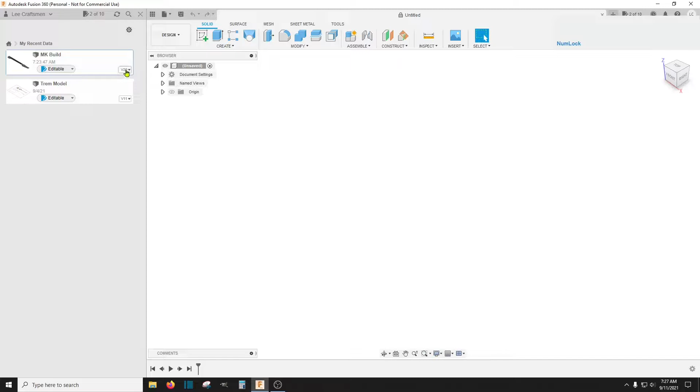I'll show you one thing up here. When you're opening up your projects, you probably notice this version number. You can click on this and go back and open up previous versions that you saved, just in case you've made some mistakes you can't really get away from. This is one way to go back in time.

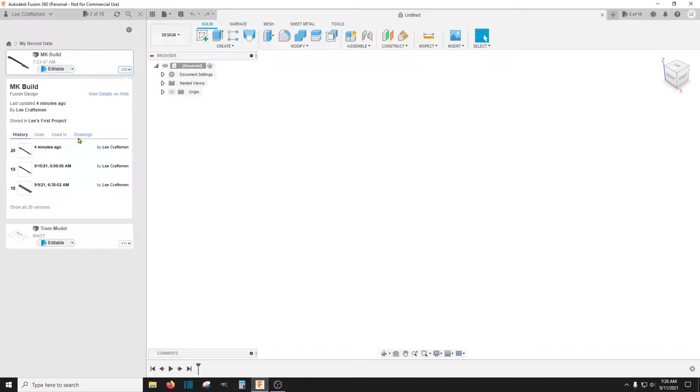For instance, I'm here 4 minutes ago that I saved, and I recorded the entire video without actually pressing the record button, so I'm going to do it all again. Just be aware that I've already done this once, so you'll see some stuff still showing up as saved already.

So a quick update. I ordered some parts from China on eBay, which promptly took my money and then 2 days later said we can't ship it to you for that cost. We need $25 more, or $22 more, after already paying $30 something in shipping. And I said no, I'm not going to go that route, just cancel my order. So the next day I get an email from China, which was very strange, that said, oh, our fault, we'll pay for it.

And they never do that. They never ever do that. I didn't respond to that. And then the next thing, I get an email saying, oh, the blue model's not available here, but we have a nice gold one we'll give you instead, which went from premium Chinese to bottom end Chinese.

So I declined that, and because it's through eBay, they had no choice but to refund my money. And the reason I was pushing on getting those out of China, not just ordering off the US sites, is that I'm using a 3-phase motor system out there right now, and I didn't want to disturb that. I want to keep it all 3-phase, and those are really expensive on Amazon.com and those kind of places.

However, I went ahead and just bought a 2-phase, which is actually better, a stronger motor, twice as strong. It'll be here on Monday, so hopefully next week we'll get back to business on cutting this stuff.

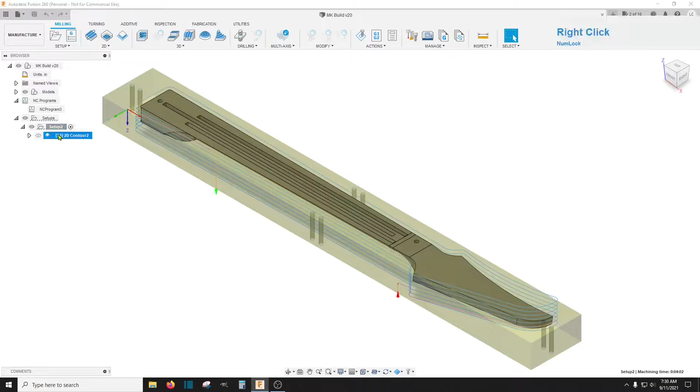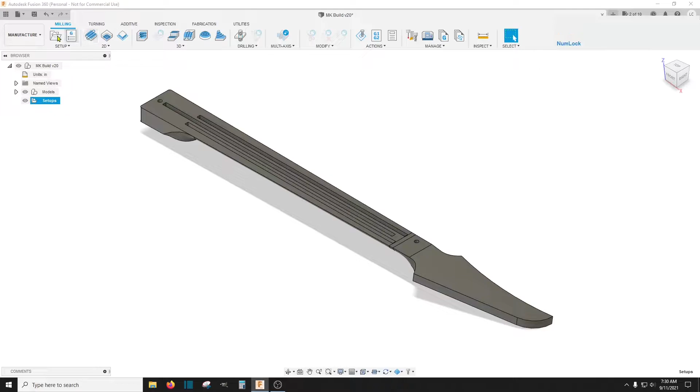So anyway, this is set up for the last cuts I did. I'm going to go ahead and remove these. And this is where we left off last time. So we're going to head on over here to manufacturing, and I'm going to create a new setup here. I'm just going to call this one the head, and make sure I'm in my G56 offset here.

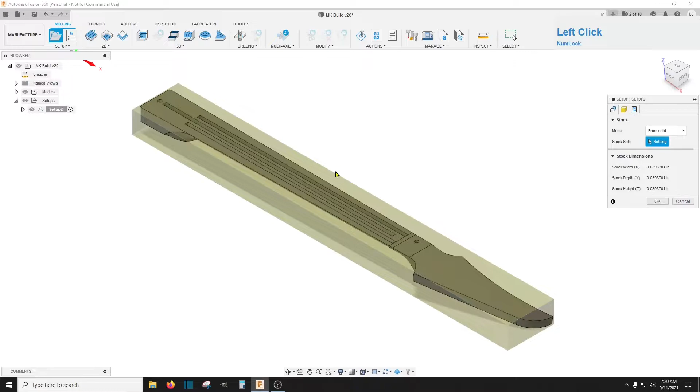And the mode will be from a solid. Neck blank, and then the stock point's going to be up here, and that all looks pretty good. I'm going to click OK on this.

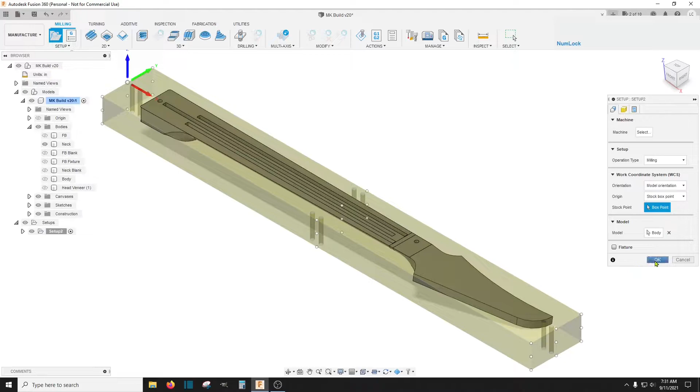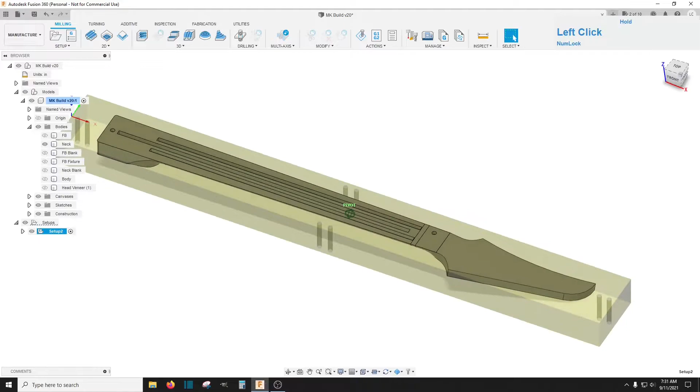Now, because I have a bandsaw, I'm going to remove all the bulk material, which you can see is quite a bit. Not so much on the front, it's just this area in here, but on the back there's quite a bit of bulk that has to be removed. However, for whatever reason, if you can't get that done and have to do it on the CNC, this front side is not incredibly taxing on the machine, but the rear is a lot of cutting to get all that material off the back. But here's how you would do that.

You go in here to this 3D adaptive clearing right here, and for adaptive clearing you're using a flat mill, so I'm going to use a 1/2-inch flat end mill here.

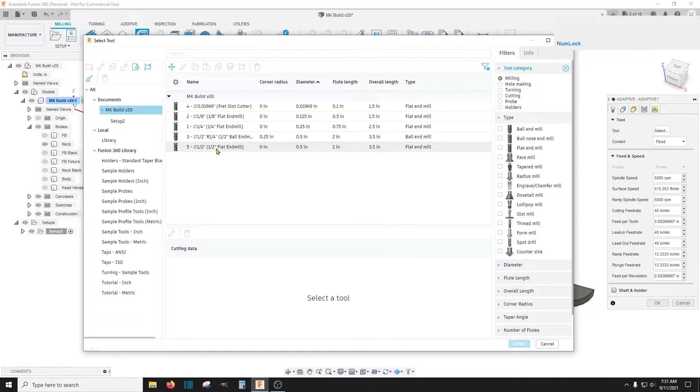Then for my geometry, I'm going to select — actually I'm going to turn off this stock contours, turn off this rest, and for geometry on this box I'm going to click on selection here, and then select just this top silhouette here.

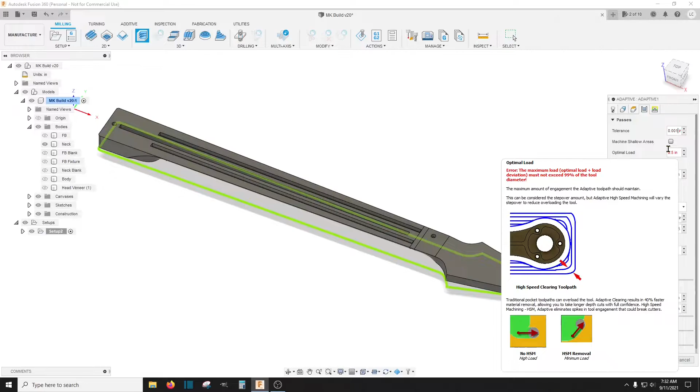And then we'll head over to this one and we'll drop this down to 0.001.001. Now this is not a step over, this is the optimum load on the bit. It cannot be greater than the diameter of the bit.

And depending on how rigid your machine is, this is how much meat it's going to take off of each cut. This adaptive clearing, they generally try to use as much length of the bit as they can and just take thinner slices. I'm going to drop this down to about 0.4.

And then the maximum roughing step down, this is how deep the cuts are going to be, the layers are going to be. For a 1/2 inch bit, I'm going to go to a 1/4 inch step down.

Stock to leave, make sure this is on. You don't want to cut it all the way down to the model. Turn on my smoothing here. Make sure this is 001, 0.001.

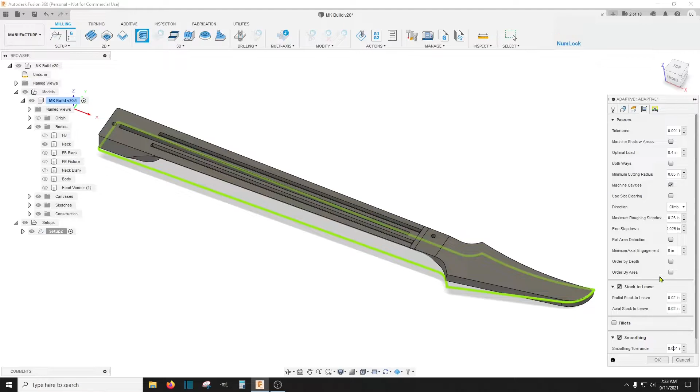And then the last thing, this ramp helix, we can probably take this up to about 10 degrees. At 2 degrees, that's just too many circles — more wear and tear on the machine. And just click OK on that, see how it looks.

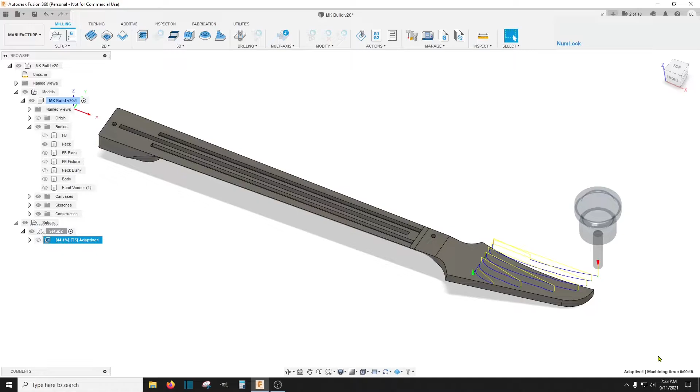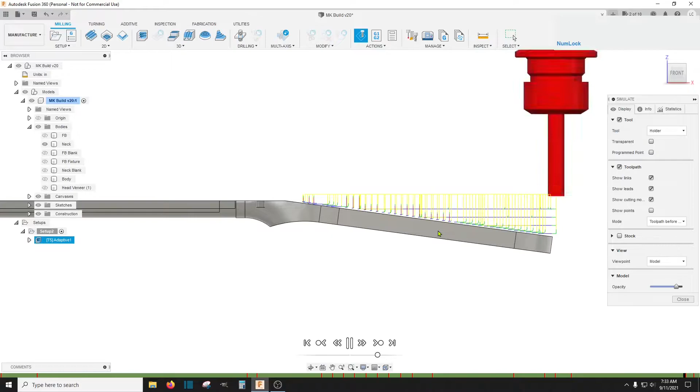Let's go ahead and run this and turn the stock off so we can see what that toolpath is going to look like. Actually, I've already turned the stock off here. Okay, so that's going to do 4 paths.

And then if we turn that stock back on, you can see what it's going to look like. That's what the kind of face it's going to leave on it. Bumpity, bumpity, bumpity. And that'll clear your stock out of the way.

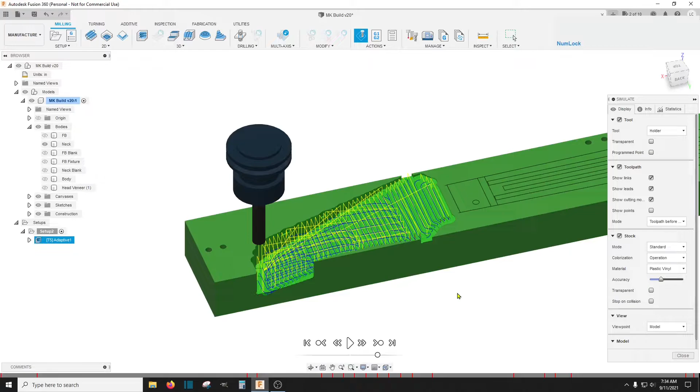And then from there you go to a 3D parallel cut here. And this, you'll need a ball nose. I can't stress enough, make sure you read this very well. Ball nose, not bull nose. It makes a big difference. It'll mess your model up if you do bull nose, unless you have a bull nose bit.

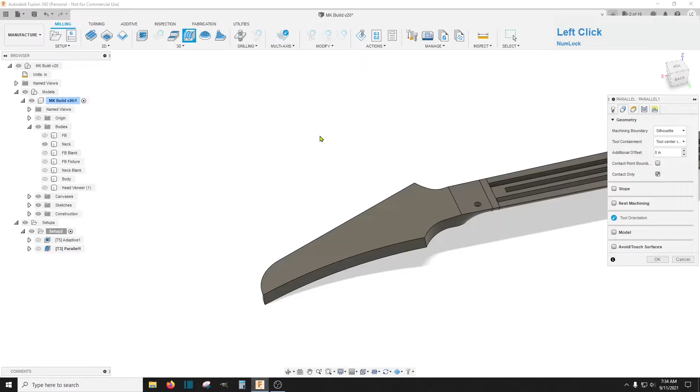And then for the geometry, same thing. We're going to select this top band here, and then we're going to use this avoid and touch surfaces, and we'll go to the touch surfaces, and we're going to select just this head up here, and we can take this tolerance down right here too.

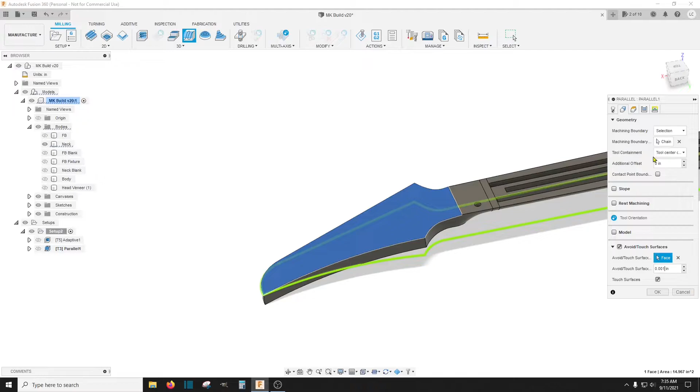All these tolerances are taken down throughout the model here. What that does is speed up the cut time, because that's way too much tolerance for cutting wood. I mean, that's more tolerance than the sandpaper, so there's just no need in being that precise for what we're doing. It's good that Fusion has that much tolerance in case your machine is strong enough to cut metal.

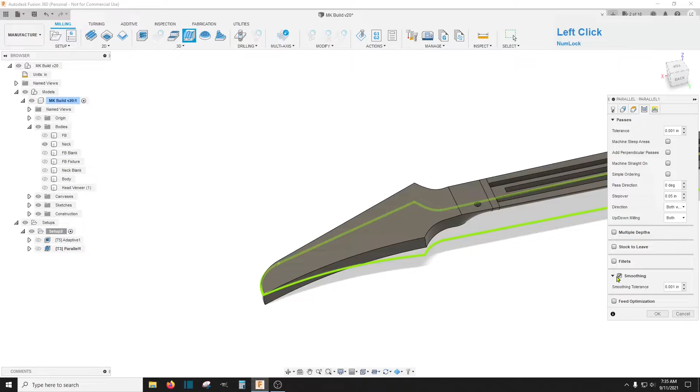And then here's the step over, and this is how much sanding you want to do when it's finished. So I'm going to put that down to about a 0.05 inch step over. Don't leave any stock on this one. Turn the smoothing on, and should be good to go on that.

Yep, up and down, back and forth. Stays inside. And as you can see, the first cut you did left plenty of room that your bit's not going to dive into the sides when it comes close to the edges out here, or it shouldn't anyway. So I'm good with that.

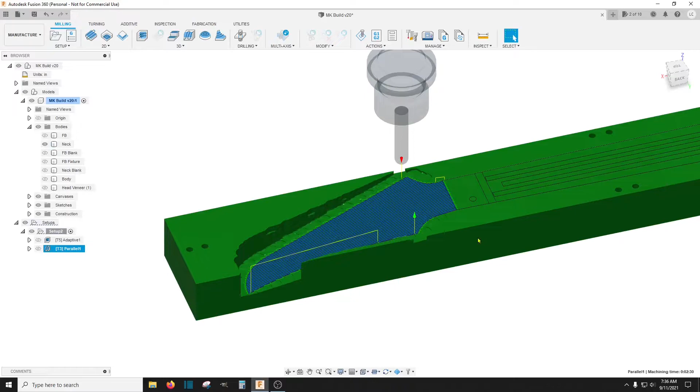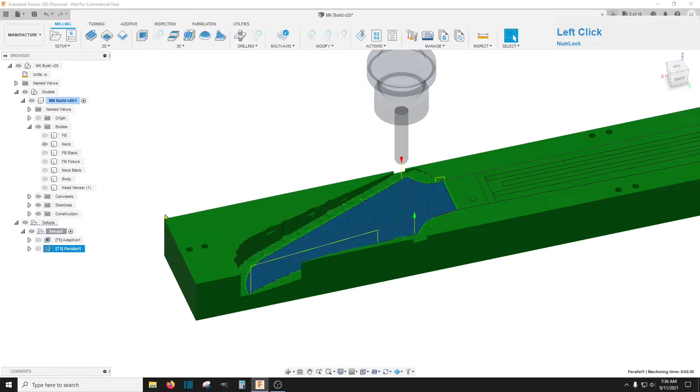Now, as before, you can't save both of these as one motion because we're going to change the bit in between, tool change. So you would have to click here and up here to save or post that one, and then come back and click here and do a second post, which is the only one I need. This is my head document. Post that. Overwrite the following, yes, because we've already done this once.

And make sure you're in your G56. You'll know if you're not in G56 when you home your machine. You change your offset, you move your machine out to the G56 offset, you get your model in place, and you hit run, which is always done at very, very slow speeds the first time to find out which direction your head's going to move in.

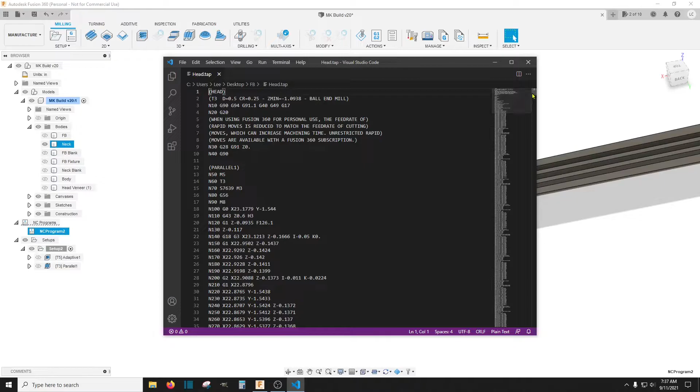If it starts taking off in the wrong direction, headed back for home, you know that your offset is wrong here, in which case you just open this file up, even in a notepad, doesn't matter, and change this to the G56 offset. If you forgot to do it at this point, you can always change it later. But that's just a tip. If your machine looks like it's going the wrong way, it probably is going to the wrong offset. Take out these homing moves and save.

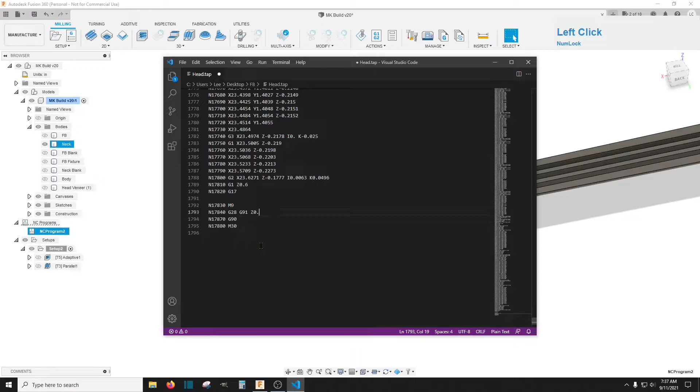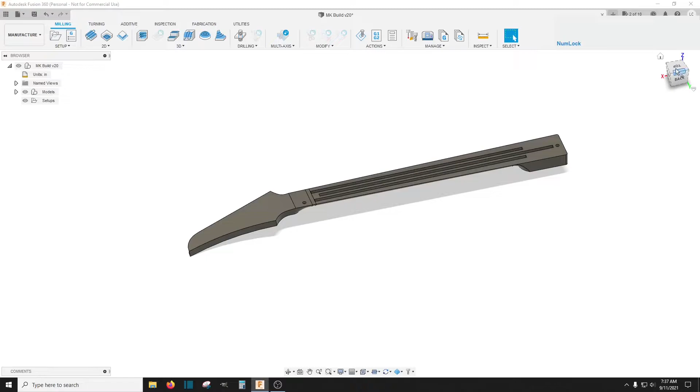Alrighty, so we got that part done, and I'm going to delete this whole setup because we're going to roll this thing over. And delete this posting, hide this stuff. Now I want to roll this thing upside down and rotate it twice this way, like that.

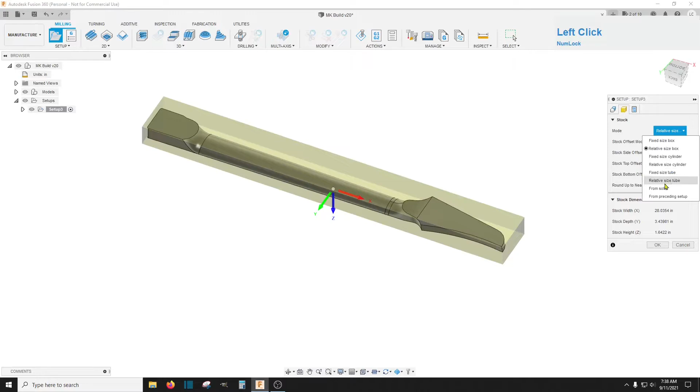And we're going to do the same thing again here. We're going to create a new setup and go here, and this I'm going to call the neck back, and change my offset to my G56. Go to my stock, and I'm going to use that from solid models neck blank.

And then here for the box point's going to be up here now, and hit this here to flip it over, and that's good.

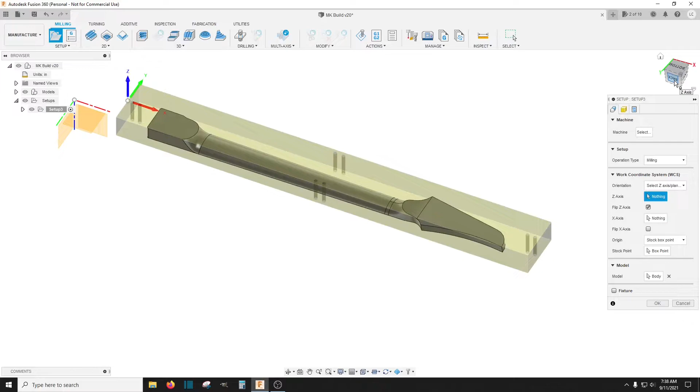So the reason we created this stock to start with, besides just having a piece of stock that we can actually cut, it just keeps everything exactly where it's supposed to be. Without using stock, then you have to center everything up, and it's just way easier to just make a piece of stock to use. Everything then is exactly where it's supposed to be, and very little chance of having something set up wrong or incorrectly, or a cut height not correct, when you use a stock instead of just using the model to work off of.

And okay, that's all good. Click OK on there.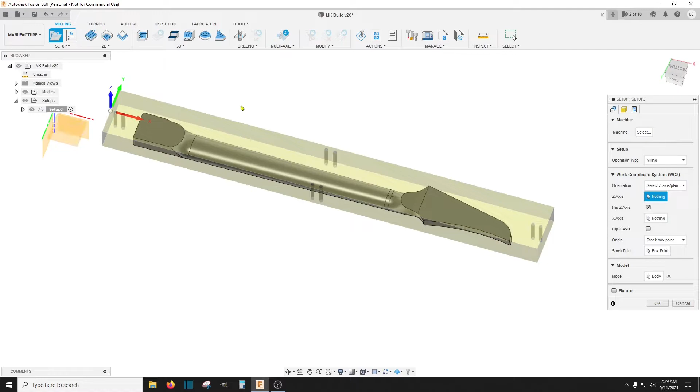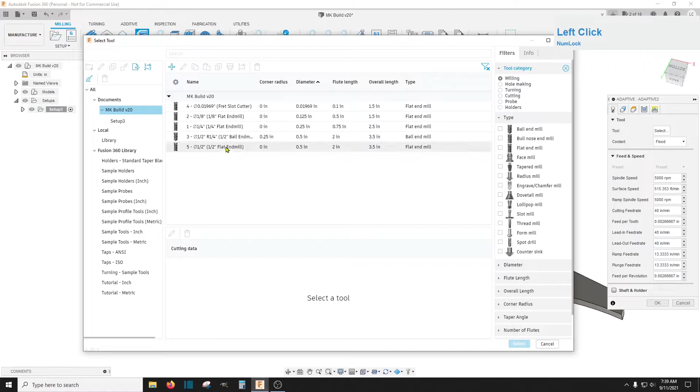And again, if you need to do a clearing move, it's really going to eat up a lot of your machine life. That's a lot of material to move. So I'm going to go to this 3D adaptive clearing again, flat mill, select those same lines. Whoops, get rid of the stock contours, reset, change this to selection, and select those same lines as before. Now it's on the bottom.

And then go to this tab and knock this down to 1. And change this load here to 0.4 for this mill. My step down is 1/4 inch, which I could actually probably go 1/2 inch with this bit. My machine's pretty stout.

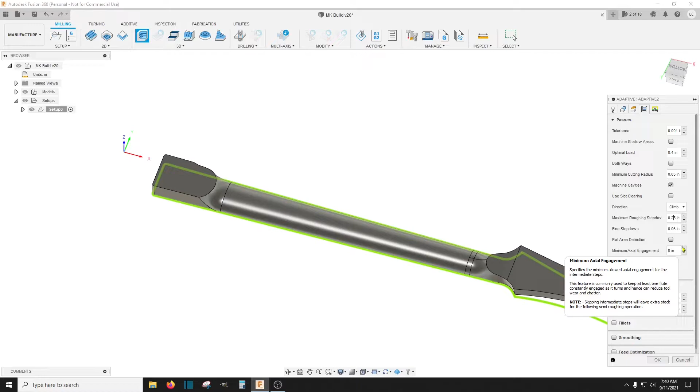Stock to leave, yes. Smoothing on. Take this 0 out of here. Same old, same old. And the ramp can go up to 10 or 12. Let's put 12 in here for this. And click OK on that.

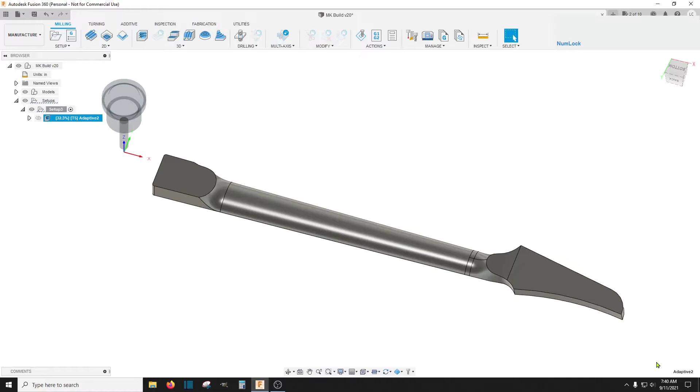Calculating, calculating, and that looks pretty good. Looks like everything stayed inside the boundaries.

Gonna flip it up here on the bottom just to make sure it's not going through. These yellow lines are just moves of the machine. That should be above those holes. It's the blue lines that are actually cutting, so those are just moves. They look fine. It looks like we're all good for that.

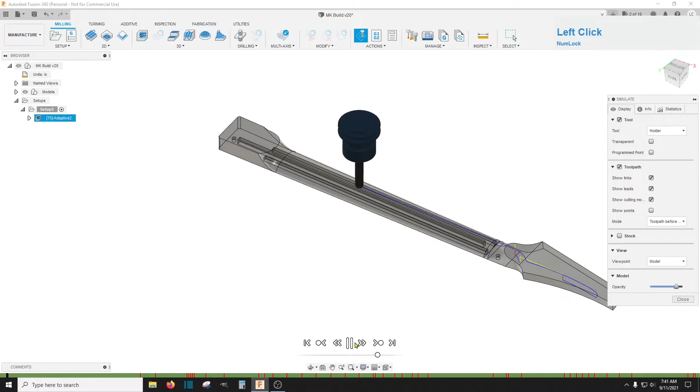See what that looks like. If I can turn this stock off and run it, we can see the milling.

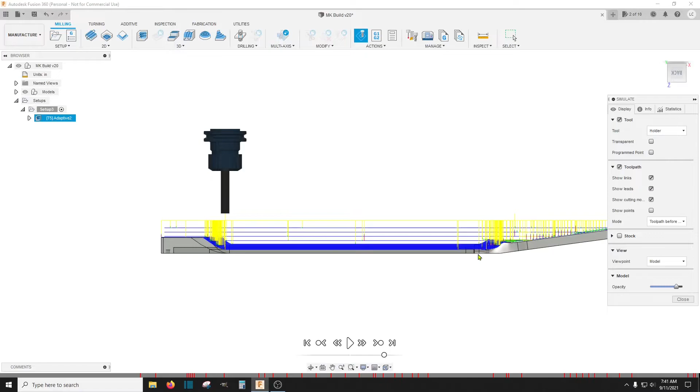It's pretty strange to mill. It's bouncing back and forth from end to end to end to end to end to end. It's a lot of wear on the machine, but it gets the job done.

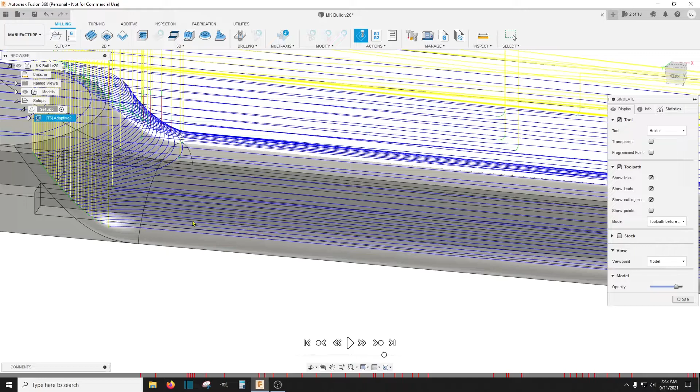Wondering a little bit why it's not going all the way down. I guess that's 90 degrees right there. Yeah, I guess so. That's because the contour is still at 90 degrees here. Okay, we'll find out when we cut it. Maybe some sanding involved if it's not exactly right.

So that's good for that one. So the next process, we'll go back to the 3D parallel and change back to the ball end.

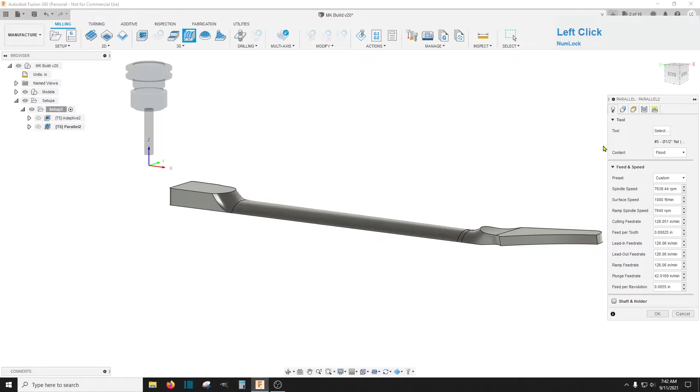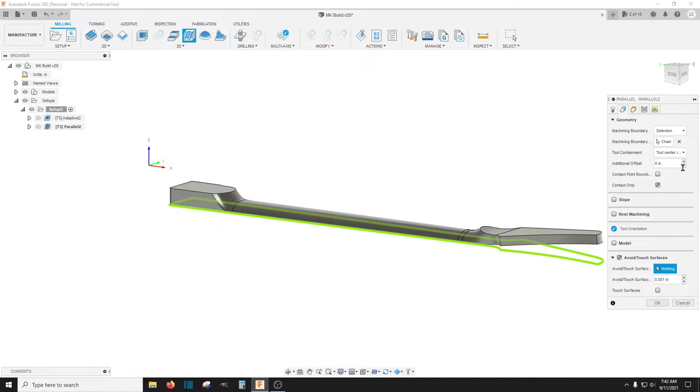And select that same silhouette here on the bottom. This time we're going to use the avoid/touch surfaces again here. We'll take this tolerance down right here for sure. And then the touch surfaces will be everything facing up here.

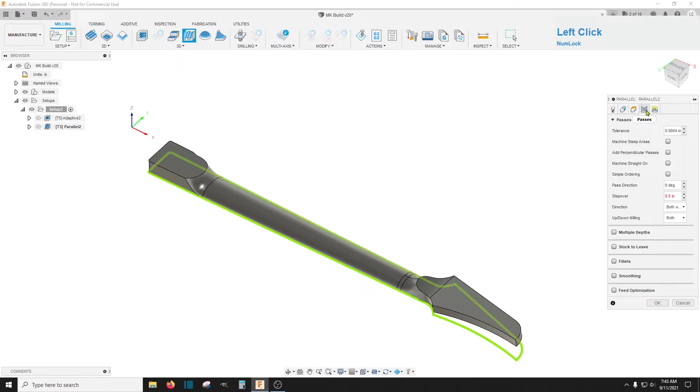All of that, that's good. Tolerance. Step over will be 0.05. And smoothing on, and should be good to go.

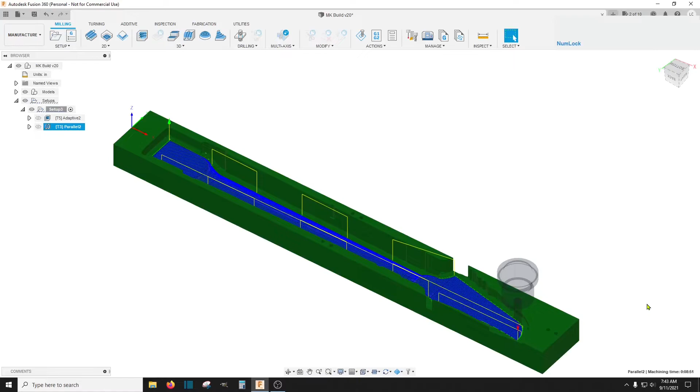Looks good to me, I'm gonna post that one. The neck back is fine. Just resave all this stuff, that way I am cutting exactly what you saw me design here.

Okay, I'm going to get rid of these two. Keep the same setup. And now we're going to do a 2D contour.

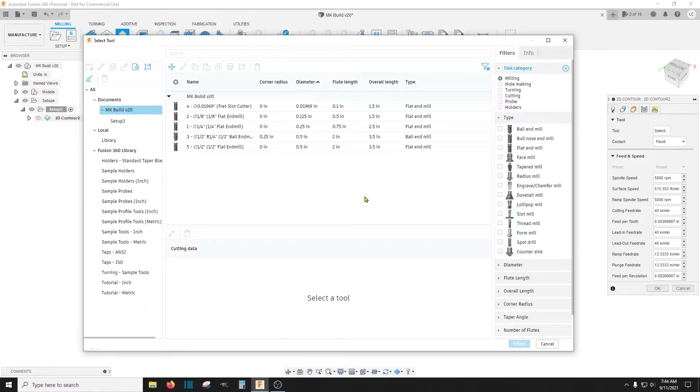Now for this, you can use a flat end mill. The smaller the bit, the less chatter you're going to get, the less material it's going to move, and the less chance it's going to be of pushing your stock off of the table. And also the quieter it's going to be.

And the reason I mention that is that at this point there's going to be a couple of pins sticking out into the neck on the back, and that's going to give it most of its stability from moving in any lateral direction. But the only thing that's going to be holding it down on the table is the tool pressure and some double tape and super glue trick, which is really strong. I never really had an issue with doing it this way, but we're not going to have any mechanical fasteners holding this thing down as far as laterally for the finish of this cut.

Now it will be held down by 4 mechanical supports all the way down until that last cut. When that last cut comes around, it's going to have to rely on the tape to hold it in place. That being said, the big bit's going to create a lot more force on that last cut, which really shouldn't matter. It's only going to be paper thin most likely, or we could tell the machine to make the last cut paper thin.

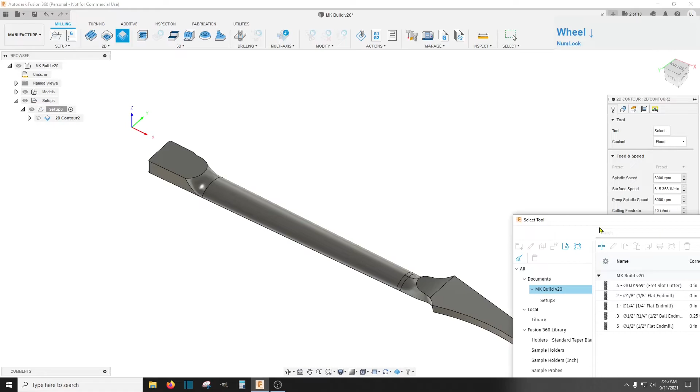But still, if it touches the side of the model at all, it's pushing all the weight of that cutter, trying to push this thing to the side laterally -- or, I mean, at some point. Anyway, you get what I'm talking about. Side to side force is going to be increased the bigger the diameter of your end mill.

I found 3/8 is a good in between for sound, vibration, and noise. 1/2 inch is a little bit too aggressive, and a 1/4 inch generally I can't really find a bit long enough usually to get around everything comfortably.

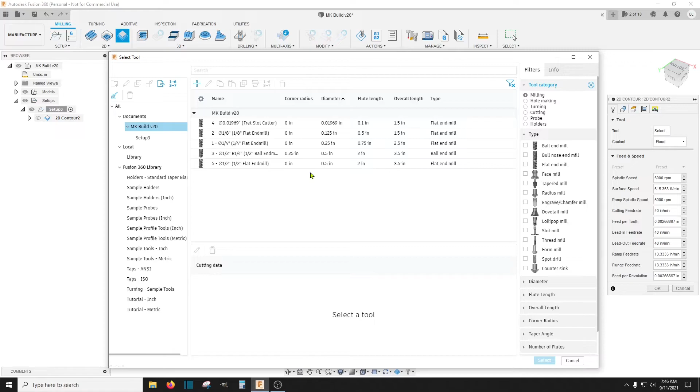The 1/4 inch bits I use from the box stores here are usually pretty short compared to my 3/8, and my 1/2 inch bits are over 3 inches long. I keep saying bits, I should be saying end mills, but you know what I mean. I'm going to use the 1/2 inch on this one.

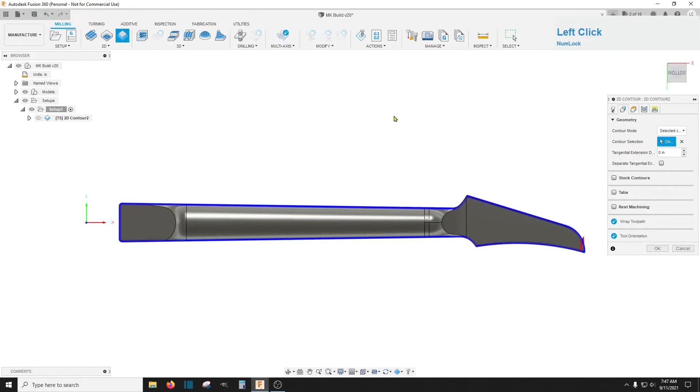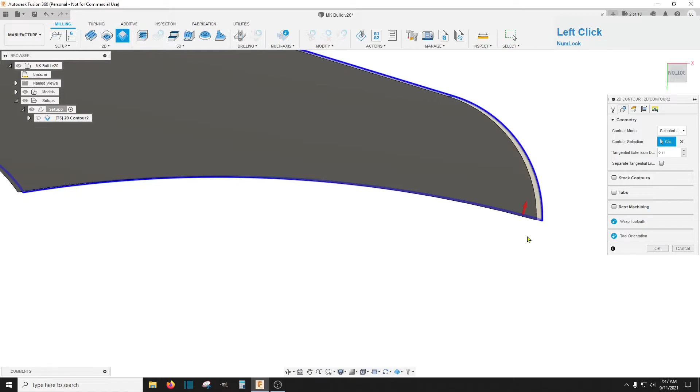My machine can take it, and the geometry is going to be the same as we used before. Now rotate up here and make sure this red arrow is on. See, right now the arrow's on the inside... now it's on the outside. It's hard to tell on this one. You'll know when you start to cut it, but whatever side the arrow is on, that's whether it's going to cut to the outside or the inside of the profile. It looks like this is on the outside, but that's pretty strange that it's not actually out here. When you click it, it doesn't really change much. Anyway, we'll see when we do the tool path.

We're here, it's all good, and here I am going to go ahead and put the bottom height as the stock bottom, and then in here, the normal stuff here.

This one we will do multiple depths on, and I'm going to do 1/4 inch. I could do a little bit more with this bit, but just because of the noise, I'm only going to do 1/4 inch. That's all fine, we're not leaving any stock on this.

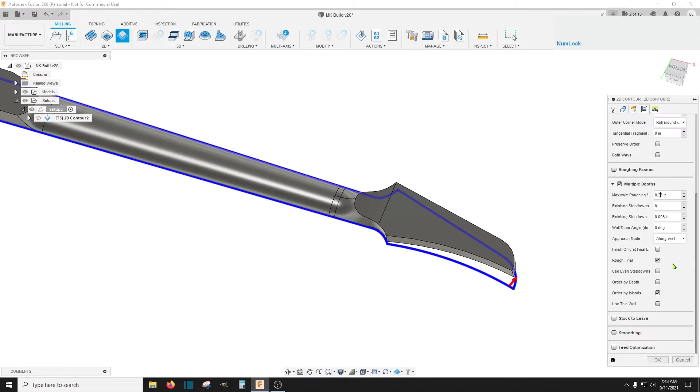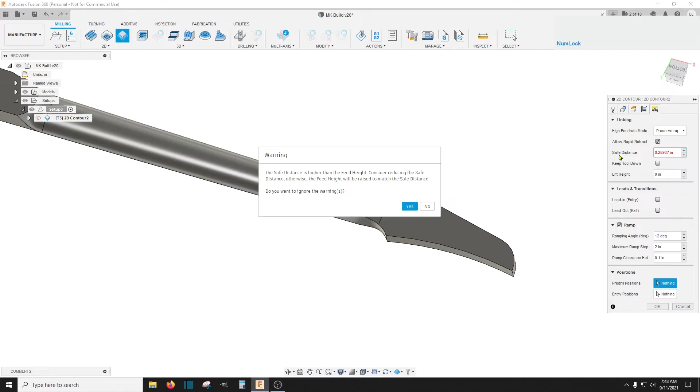These lead ins may get you in trouble, your bit slams into the entire piece of stock that's left on the side out here, which could throw material all over the room or something. You never know. I'm going to go ahead and turn these lead in and lead out off and do a ramp instead, ramping in about 12 degrees. See what that looks like. Safe distance, you need to lower this value right here. It's at 0.28, I think 0.2 is where my retract height is, so if I take this below 0.2 it should be okay. I'll just do 0.15.

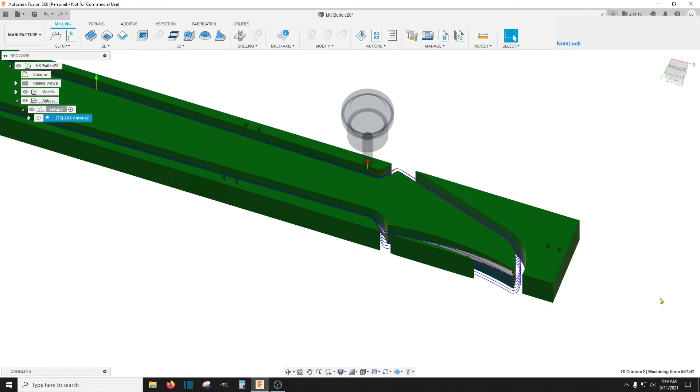That stuff's not going to stop the cut from happening, but it may save you from running into something sticking above the work surface. So you can see that's plenty of passes, it'll take a while to get down through all these passes to the tabletop. Now you see here my last cut is quite thick, it is a full 1/4 inch.

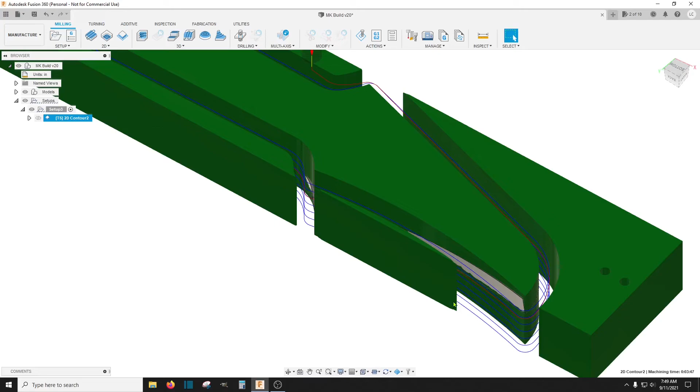If you want to have less strain on this neck as it's being cut entirely away from all these hold downs, in this back one here you'll see it's basically held in place on 3 sides, which is really good, until this last cut where it comes out back here. So it's going to travel all the way around. This side will have already been cut, and the last cut it's going to make will take out this little strip around here and come out here.

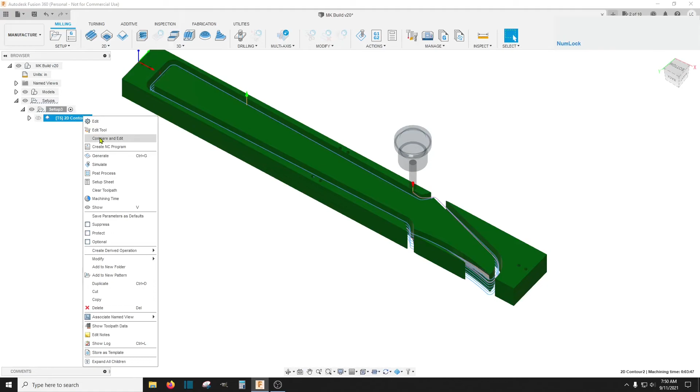You could actually go in here and edit this and put a final pass on here, make that thinner. And here you have this finishing step down, you could put that in here. It's already set to this number here, it might be that number, I don't see it on the toolpath though. But you could add a finish step down and play around with that and get that last step to just a little tiny sliver of wood holding it all together.

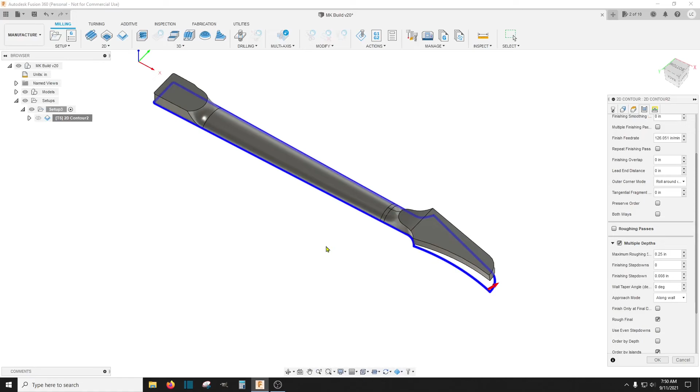Not necessary for my machine. And besides that, I'm not using really good wood on this build, so I always test everything with pine first, so we'll see how it goes with my test cuts.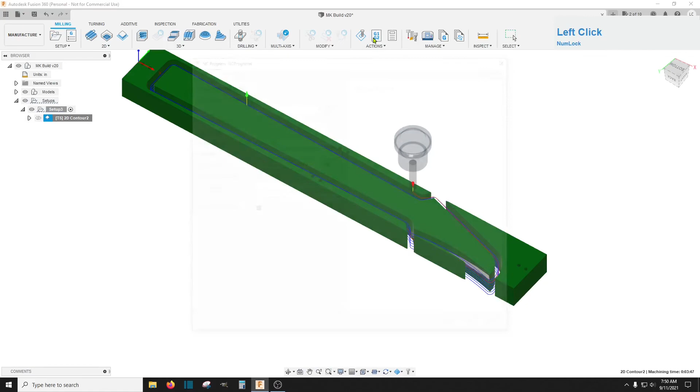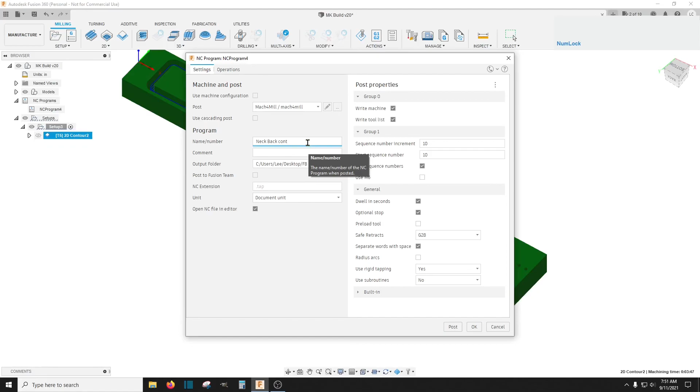I'm going to post this, and since I'm already using the neck back for the profile, I'm going to call this one the neck back contour. So is it contour, or contour, or contour? I don't know, I'm going to go with this one, it sounds more French. Post that and overwrite.

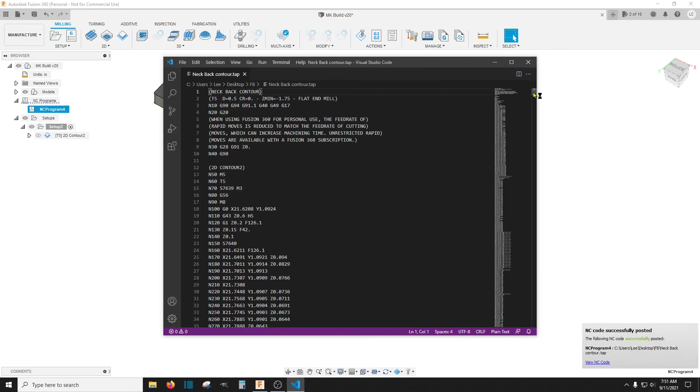Good to go. G56, and no homing moves.

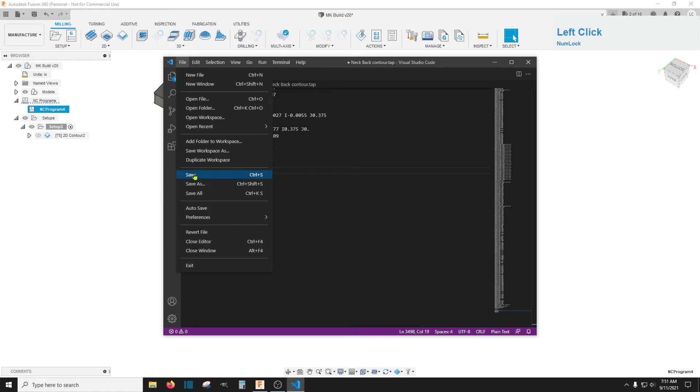Alright folks, and with that we should be ready to cut. Hopefully Monday or Tuesday I'll have my machine running again, and sometime mid next week I will cut out these 2 parts and we'll video that and see how that goes. I think I'm going to do a little interim video right before the cut, just showing basic materials and supplies and things you'll need to actually start putting this thing together. Try not to be a talking head so much, and then the next build video should be the body, I think that'll only be one video. It's the easiest, simplest, fastest thing to do, should be good to go on that. So alright, don't forget to save your work here guys, Control S, and God bless you all. Thanks for watching.